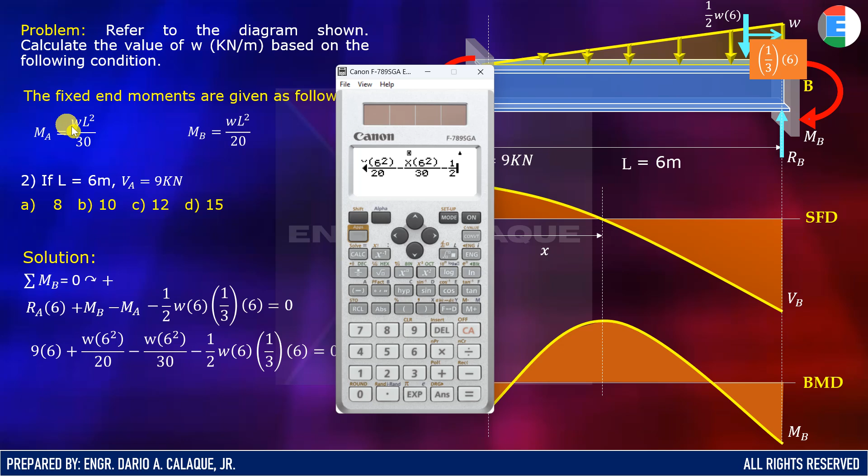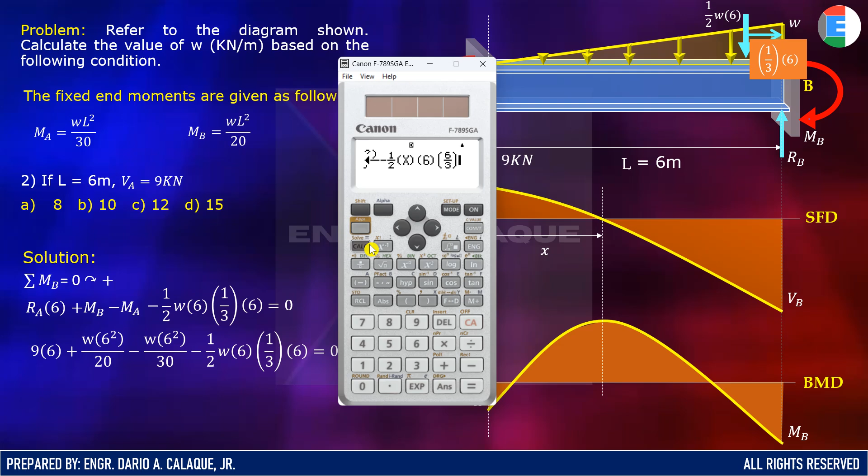And then, minus. So, yung kinaganda nito, wala kang formula na minimorize, diba? So, yun lang din yung kagandahan. So, we have, bali, ito lang yung alam mo, no? So, this is alpha x times 6 times 6 divided by 3. So, alpha equal to 0 natin yan. Shift solve. Ayan, 10 kilonewton per meter. So, yan na yung sagot. You can use the formula kung alam mo yung formula, or you can just use summation of moment dito sa point B. Pwede na din.

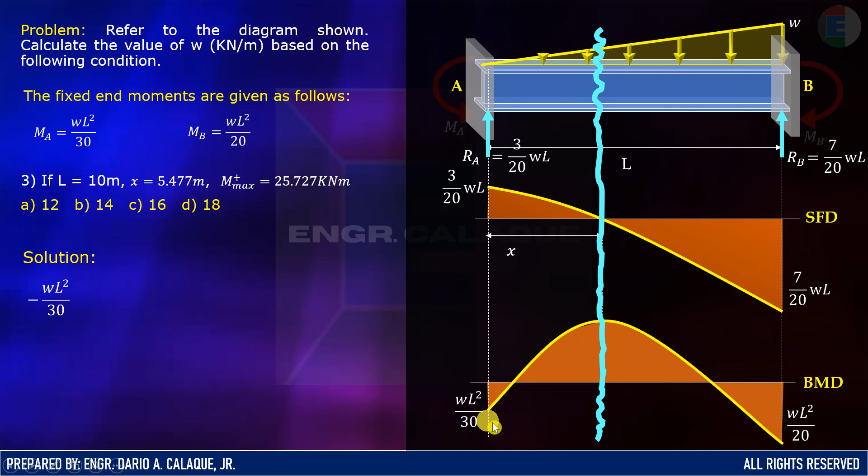Okay, punta tayo sa part 3. So, sa part 3 naman, yung length is 10 meters, yung x is 5.477 meters, saka yung maximum positive moment is 25.727. So, to calculate this one, again, yung given natin is itong x saka yung moment dito. So, putulin na lang natin yung beam hanggang dito lang, kung saan yung zero shear, maximum positive moment. Okay, so kukunin natin yung moment dito. So, first, ito siya, which is a negative moment. So, that's why it's negative WL squared over 30. And then, meron ka na dito.

So, yung gagawin mo, i-add mo yung sa shear. Di ba? Kasi positive shear to. So, plus tayo nung shear. So, again, first degree to. So, meaning, pagdating mo dito, second degree. So, kung second degree yan, kung kukunin mo yung area nito, triangular yung load. So, this is just area of the parabola, which is 2/3 of the base times height. So, yung base is yung x. And then, yung height, yun yung 3 over 20 nung WL. So, yung x natin is 5.477 as given sa problem. So, meron tayong plus 2/3 of the base. Ito yun. And then, the height is 3 over 20 WL.

So, meaning, meron kang negative na moment plus yung shear area. So, makukuha mo yung moment dito, which is 25.727. So, pwede natin i-equal yan sa 25.727. So, substitute lang natin yung mga length, which is 10 meters, di ba? So, lagay natin yan dito. Yan din dito. Then, equal sa 25.727. And then, using our calculator, makukuha natin yung sagot. Okay, so we have Wx times 10 squared divided by 30 plus yung 2/3 nung 3 over 20.

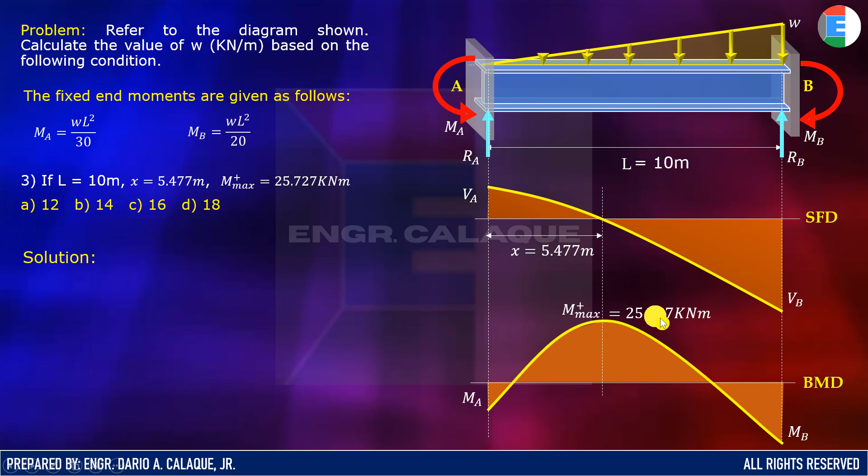Okay? So, pwede rin dito ka na lang mag-focus din sa loading diagram mo. So, for instance, di ba yung length is 10 meters, ito siya is 5.477, then ito yung maximum moment, positive, is 25.727. Pwede natin putulin yan, kasi dito naman yung focus natin. Then, we just isolate yung dito na portion. So, mag-focus lang tayo more dito sa loading diagram. This is alternate way na. Pwede yung kanina, pwede rin ganito.

So, kumbaga, kukunin mo yung y dito, no? So, di ba, yung shortcut lang natin dito, kukunin mo lang yung w over mo lang nung length nito, which is 10 meters. And then, multiply mo lang nung distance dito, which is x. So, make sure na ito yung x mo. So, magiging ano yan, w over L times yung distance mo dito. So, yung L is 10 meters. So, balikan ito yung y mo.

So, ngayon, di ba yung shear natin, which is also equal sa reaction. Okay? And then, alam natin na yung shear mo dito is 0. So, kukunin mo na lang yung shear niya dyan. So, kumbaga, equal na lang natin sa 0, kasi 0 man yung shear dito. So, yung shear, kumbaga, ito yung RA tsaka yung equivalent concentrated load ng triangular load dito na portion lang.

Diba? So, kumbaga, meron kang first RA. Okay? Meron kang RA minus yung area mo nito. 1/2 ng base, which is x, then yung height, which is yung y. And then yung y, we know that is w over 10 times x. Lagay natin yan. Okay, RA is equal sa 1/2 of x times y. Ayan, yung x is 5.477 and then yung y is w over 10 times x.

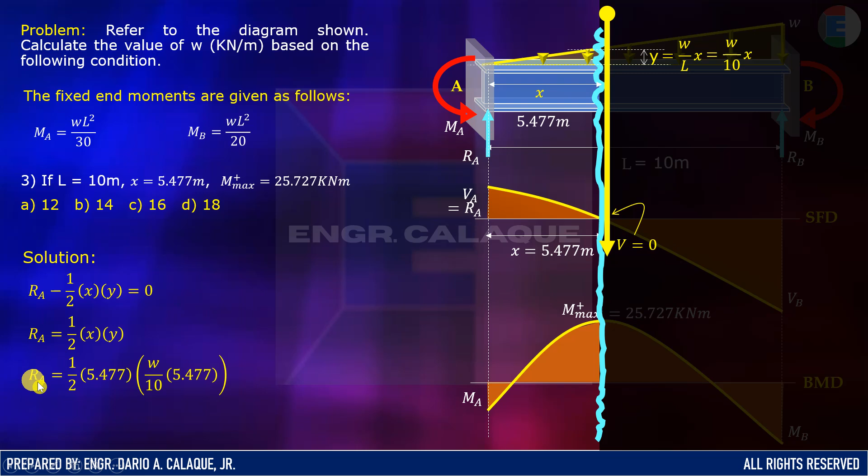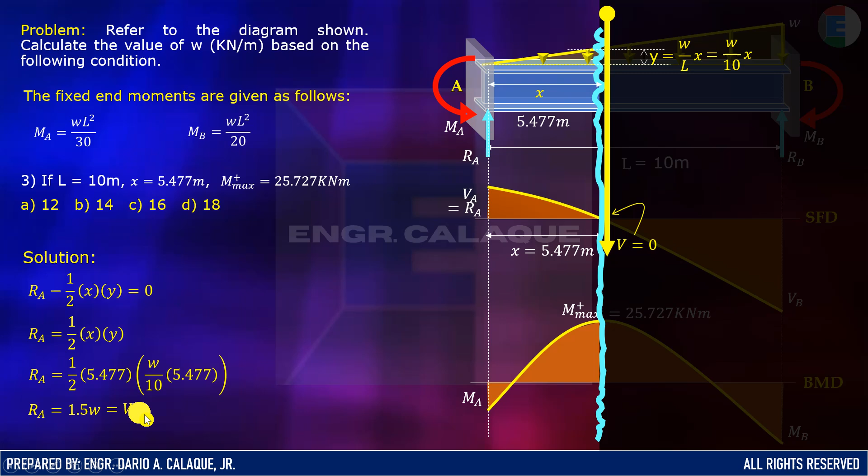So, parang ganito yan. So, we have 1/2 of 5.477 times w over 10 times yung x, which is also 5.477. So, using our calculator, simplify na natin yung 1/2 times 5.477 squared over 10. Yung makuha natin is 1.5 of the W. So, yun na yun. Equal yan nung shear mo sa point A. Okay? So, ganun lang.

So, once makuha mo na yan, next mong kukunin is yung moment. So, for the moment, maximum positive, ito na yun, which is equivalent sa 25.727. So, i-track lang din natin yung mga loading dito sa loading diagram. So, kumbaga, meron kang first, yung RA times yung distance niya, which is 5.477. So, the same yan sa assumption natin ng ikot na ganito. So, take it as positive. So, next, itong moment, baliktad. So, negative. Moment at A, which is ito yan.

Next, ano pa? Yung triangular load. Kukunin natin yung equivalent concentrated load niya, which is 1/2 of the base, times height, which is y. And then, yung moment arm niya, which is 1/3 lang nung x. So, kumbaga, we have 1/2, negative, no? Kasi baliktad sa assumption natin. So, negative 1/2, y is w over 10 of x. Next, times x. Next, moment arm, 1/3 of x. So, meron kang 1 over 2 times 3, that is 6, times 10. So, 1 over 60 w of x cubed.

Parang ganun. So, itong moment na to is equal sa 25.727 kilonewton meters given dito sa problem. So, kumbaga, meron kang ganitong equation na. So, lagay lang natin yung RA, which is 1.5 of the W, times 5.477, minus yung moment, W, L is 10 meters, so 10 squared over 30. Then, minus 1/2 ng W over 10, times x, 5.477 cubed times 1/3.

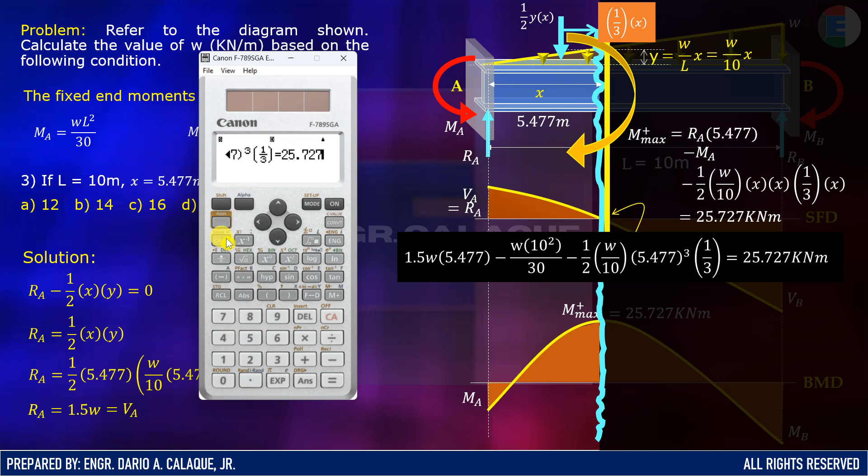So, we have 12 kilonewton per meter. So, the same result. Okay? So, I think yun lang.